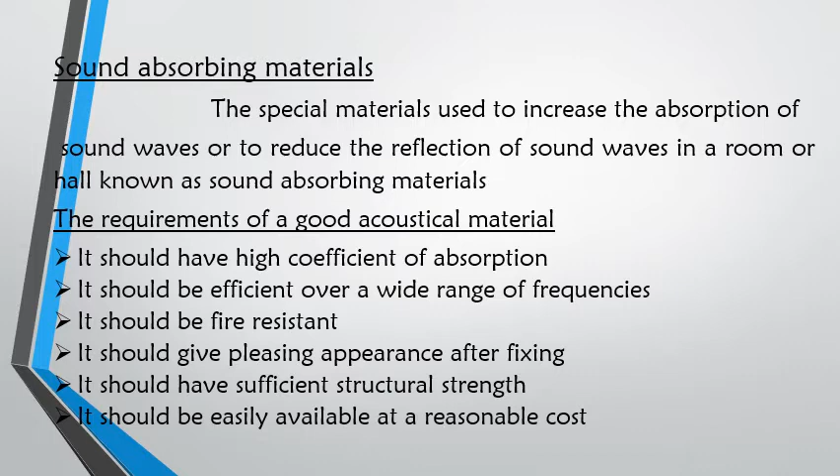It should be fire resistant. It should give a pleasing appearance after fixing. It should have sufficient structural strength. It should be easily available at a reasonable cost.

Classification of sound absorbing materials. The sound absorbing materials are broadly classified into four categories, that is porous absorbents, cavity resonators, resonant absorbents or panel absorbers, and composite types of absorbents. Here the figure shows porous absorbents.

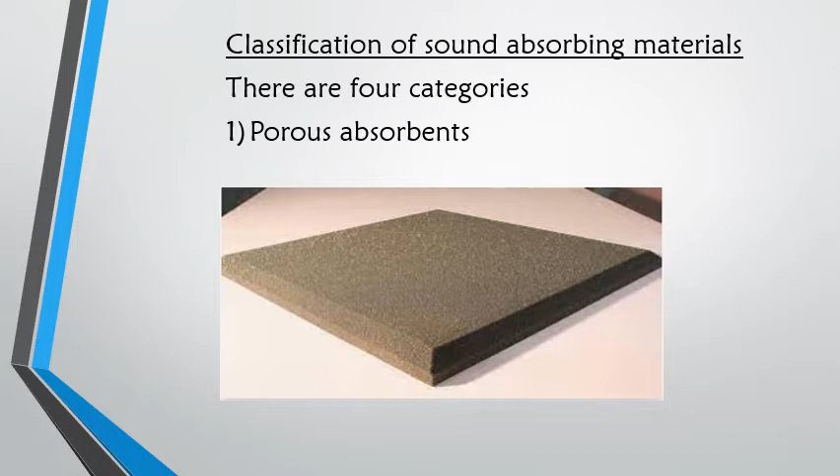When sound waves strike the porous material, a part of the waves is reflected while the other enters the porous material. The part that enters the porous material is converted into heat energy, while the reflected part is reduced in energy. Fiber boards, soft plasters, rock wool, mineral wools, and glass silk are examples of porous absorbents.

The second one is the cavity resonators. A cavity resonator is a chamber or container having a small opening. When sound waves enter the resonator, the waves are absorbed due to multiple reflections.

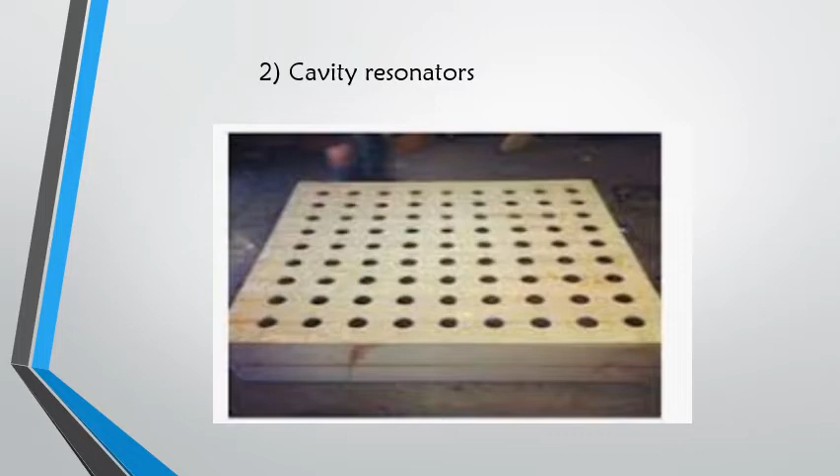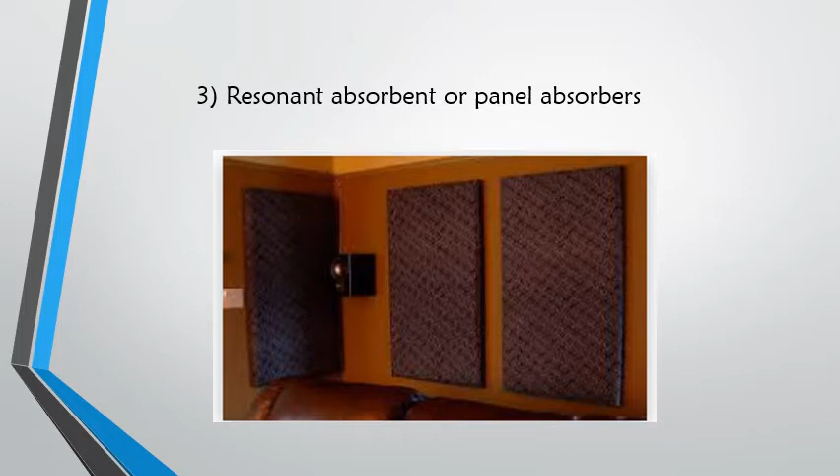The third one is the resonant absorbents or panel absorbers. The figure shows a panel absorber. In this system, the absorbent material is fixed on a framing with an airspace between the framing and the wall. It acts as a panel absorber. Gypsum boards, wood and hardboard panels, and suspended plaster ceilings are some examples of panel absorbers.

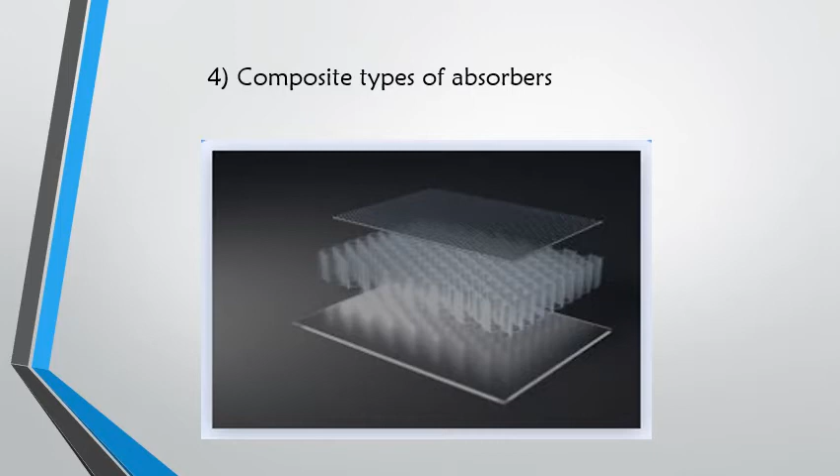The fourth one is the composite type of absorber. Here the top and bottom layers are the panel absorbers and the central layer is the porous absorbent. When the functions of all the three types described above are combined in a single unit, it is known as a composite absorber. The composite absorbers consist of a perforated panel fixed over an airspace containing porous absorbents.

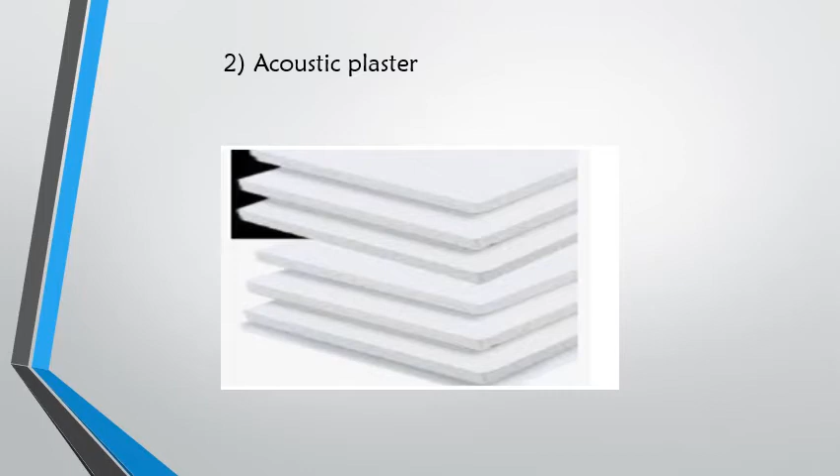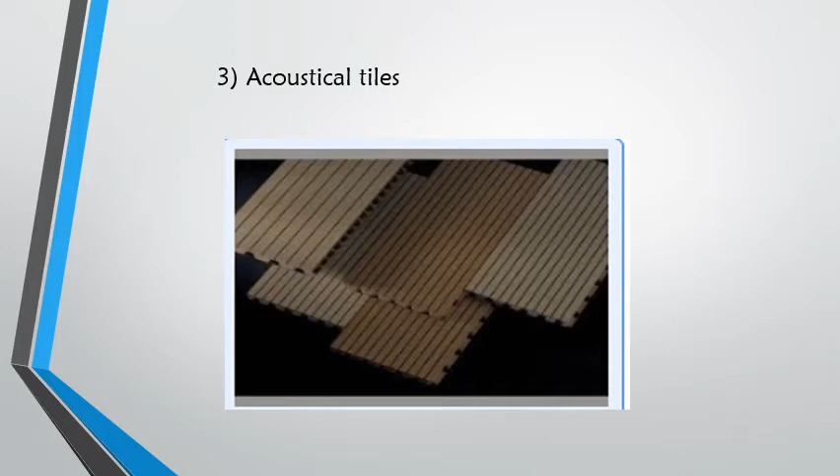The next one is acoustical tiles. The absorption of sound is uniform from tile to tile and they can be fixed easily. Strawboard is also used as an absorbing material. The next one is pulp boards. These are soft boards which are prepared from compressed pulp. They are cheap and can be fixed by ordinary paneling. The average coefficient of absorption is 0.17.

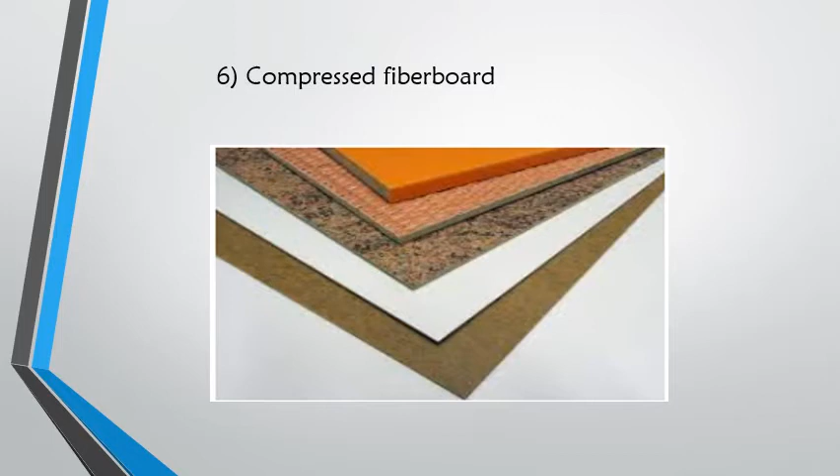The next one is compressed fiberboard. This material may be perforated or unperforated. The average coefficient of absorption for the perforated one is 0.30. The next one is compressed wood particle board. This material is provided with perforations and it can be painted also. With a thickness of about 13 mm, the average coefficient of absorption is 0.4.

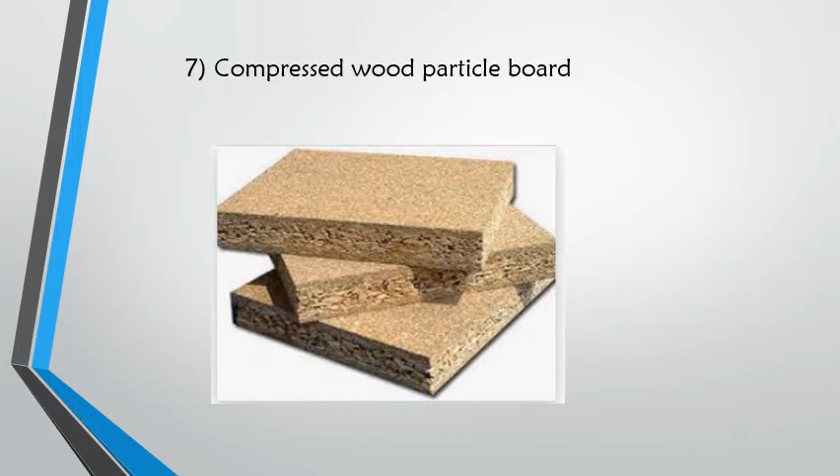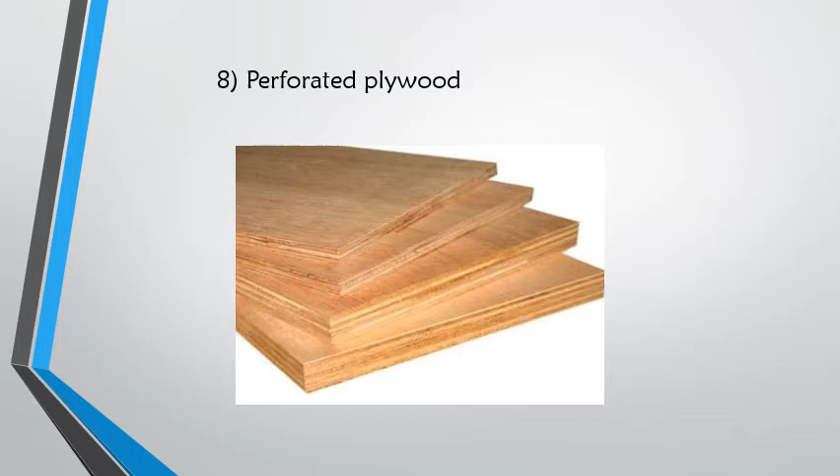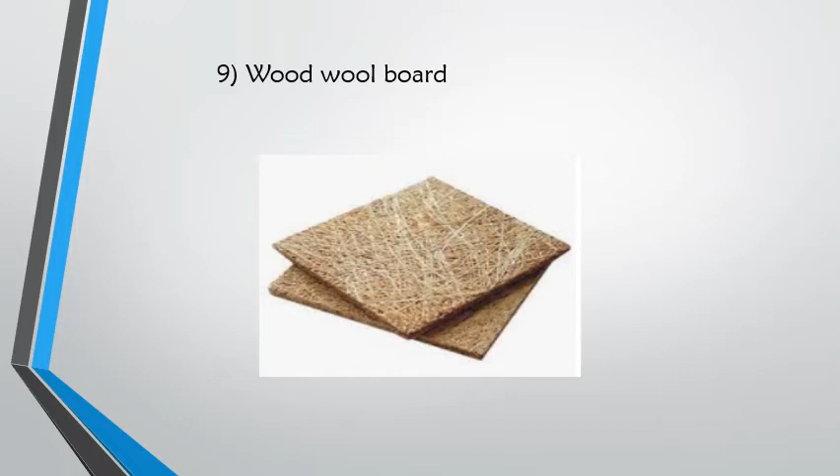The next one is perforated plywood. This material can be used by forming composite panels with mineral wool and cement asbestos or with mineral wool and hardboard. The next one is wood wool board. This material is generally used with a thickness of 25 mm. The average coefficient of absorption is 0.20.

The last one is quilts and mats. These are prepared from mineral wool or glass wool and are fixed in the form of acoustic blankets.

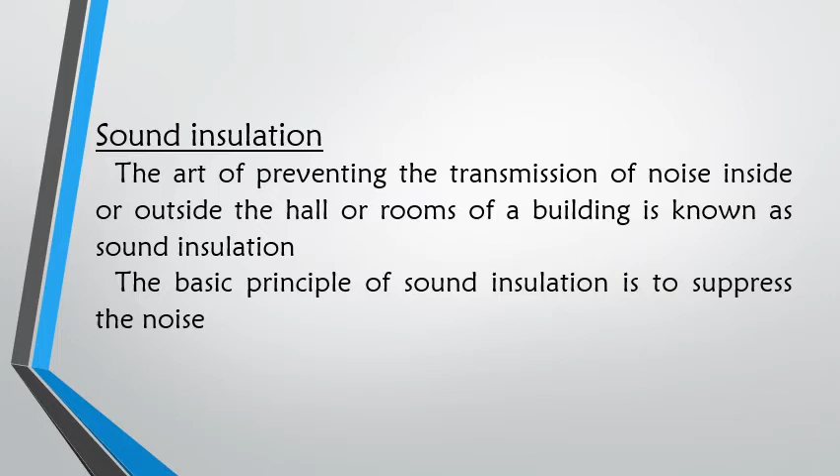What is sound insulation? The art of preventing the transmission of noise inside or outside the halls or rooms of a building is known as sound insulation. The basic principle of sound insulation is to suppress the noise. The next one is sound transmission. What is sound transmission? The passage of sound into one room of a building from a source located in another room or outside the building is termed as sound transmission.

Next one is sound insulation measurement. Sound insulation is normally measured by the sound reduction index, which describes the amount of noise reduced by a wall. The sound insulation is measured using 4 indices. The first one is sound reduction index. The second one is apparent sound reduction index. The third one is normalized level difference. And the fourth one is standardized level difference.

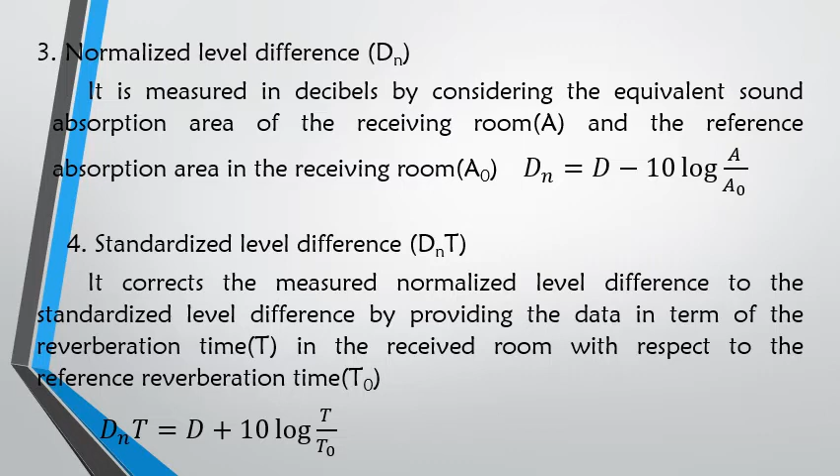Fourth one is standardized level difference. It corrects the measured normalized level difference to the standardized level difference by providing the data in terms of the reverberation time T in the receiving room with respect to the reference reverberation time T0. That is, DnT = D + 10 log (T / T0).

The next topic is methods of sound insulation. The method of sound insulation will depend on the type of noise to be treated and the degree of sound insulation required. The methods of sound insulation can thus be classified into three main categories. The first one is sound insulation when noise is airborne. The second one is sound insulation when noise is structure-borne. The third one is sound insulation when the source of noise is in the room itself.

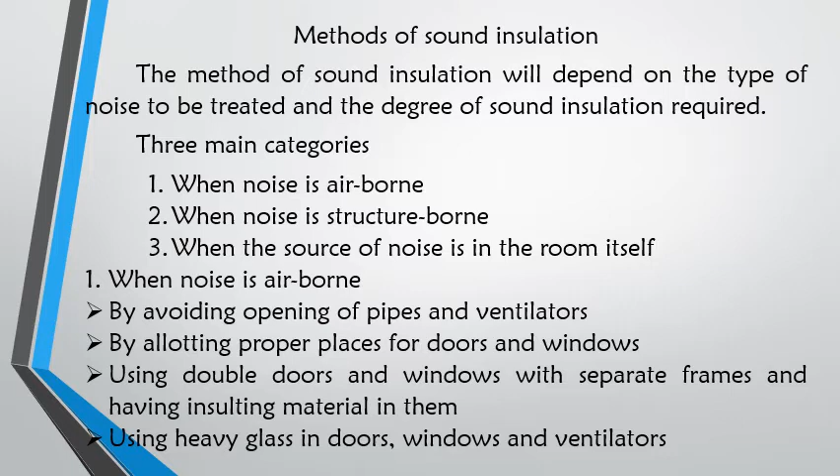First we see about sound insulation when noise is airborne. Sound insulation for the reduction of airborne noise can be achieved by the following methods: by avoiding openings of pipes and ventilators, by allotting proper places for doors and windows, using double doors and windows with separate frames and having insulating material in them, and using heavy glass in doors, windows and ventilators.

The second one is sound insulation when noise is structure-borne. Sound insulation for the reduction of structure-borne noise is done by the following ways.

Treatment of floors and ceilings with suitable sound absorbing material and anti-vibration mounts, using double walls with air space between them, insulation of machinery. Third one is sound insulation when the source of noise is in the room itself. Following are the methods of sound insulation which are commonly used when the source of noise is situated in the room to be treated for sound insulation.

That is, the walls, floors and ceilings should be provided with sound absorbing materials. The machinery like typewriters etc. should be placed on absorbent pads. The engine should be fitted on the floor with a layer of wood or felt between them. The sound absorbing materials should be mounted on the surfaces near the source of noise.

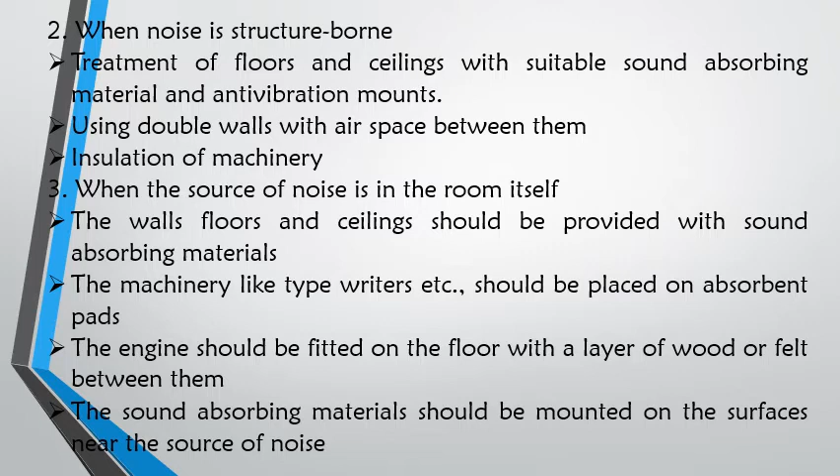Noise and its measurement. What is noise? Unwanted sound which does not give any pleasing effect to our ears is called noise. It is random sound. It does not provide information. It is a byproduct of industrial process and other activities. Noise is present in all workplaces and residential areas.

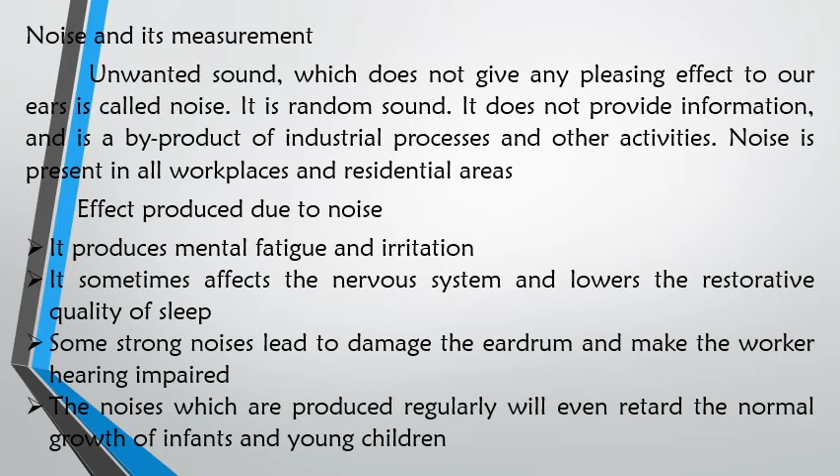Effect produced due to noise. It produces mental fatigue and irritation. It sometimes affects the nervous system and lowers the restorative quality of sleep. Some strong noises lead to damage of the eardrum and make the worker hearing impaired. The noises which are produced regularly will even retard the normal growth of infants and young children.

One is noise measurements. Any sound in the form of music or noise can be measured in decibels. We may use phon and sone also. However, noise can be measured in terms of two parameters. That is measuring amplitude in decibels, measuring frequency in hertz. Noise measuring equipments. Noise can be measured using the following equipments: sound level meter, sound dosimeter, octave band meter.

So, measuring technique. Detailed analysis has to be made on the environment using sound level meters at several locations. Inside a building, measure the noise generated due to airborne, structure-borne, etc. using octave band meters. From the observations, we can calculate sound power levels for each and every area in most common measuring scales. That is sound pressure level.

LP = 10 log10 (P² / P_ref²), where P is the sound pressure fluctuation above or below atmospheric pressure, and P_ref is 20 micropascals, that is 2 × 10⁻⁵ pascals, which is approximately the threshold of hearing.

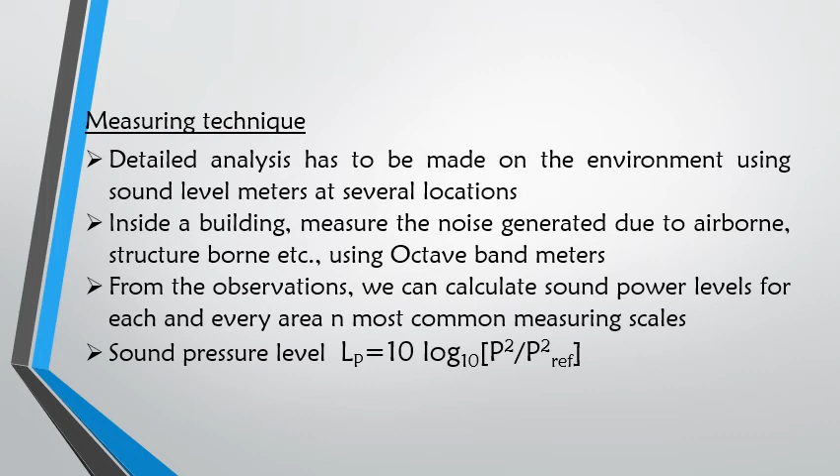The last topic is impact of noise in multi-story buildings. Multi-story buildings are defined as structures whose usage levels are regular in distribution and which correspond roughly to those required for human habitation. There are four main actions which cause impact of noise in multi-story buildings. The first one is speech privacy. The second one is background noise, for example fan, AC, generator, printer. Third one is sound masking. The fourth one is orientation of buildings.

First we see about speech privacy. It is an issue within office buildings, including individual workspaces, inside conference halls and between offices. It mainly affects the quality of work in the adjacent office. The second one is background noise. It can adversely impact the workspace. Too little background noise and speech privacy is reduced, letting you hear what is going on not only in your workspace but also away from that.

Third one is sound masking. It can blend the building system's noise levels and exterior noise levels with electronic noise systems in the middle. Traditional sound masking systems are located in loudspeakers above the ceiling. The fourth one is orientation of building. A noise pattern can be more annoying in perpendicular rooms, and windows and perpendicular walls don't reduce noise as effectively as those on parallel walls because of the angle of sound.